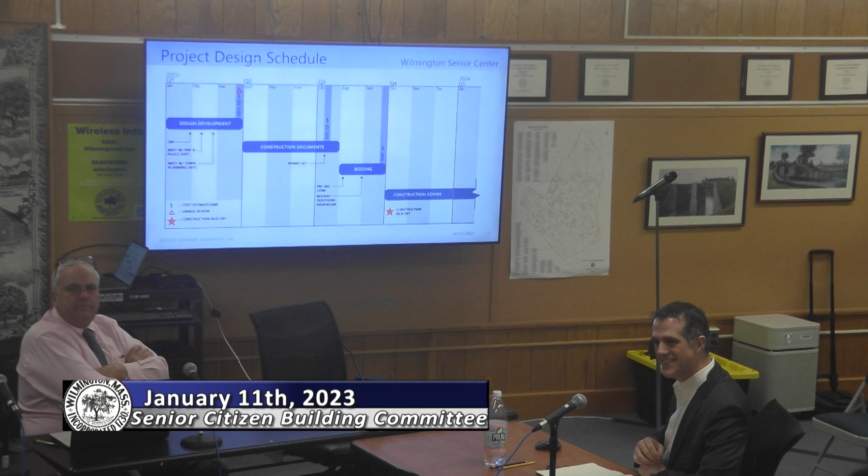That's the question, are we going to get a copy of this at the end? Absolutely, of course, I sent it to the chairman. I didn't email it out because I knew there was a change coming, which it did, so I didn't want to confuse it. That's fine, this will be sent out and all the members will get it, plus a copy will go to WCTV. The only change, in case you get the older version, is the 2 schedule slides.

So during design development, I'll just keep going. Construction documents last for about 4 months, and near the end of construction documents we have a very important cost estimate, again at 90% CDs, meaning construction documents. The reason for that cost estimate is it's our last chance to make sure the design is on track budget-wise. And if it's not, because cost estimating is more of an art than a science -- I didn't say that in public, it is absolutely a science, it is fraught with uncertainty -- because of that, we need to protect ourselves in the bidding climate. What we do is come up with design alternates, ways to control the budget as a stopgap at the end of the design process in case we're a few percent over on a given thing. You saw this happen with the estimating we did, we identified a bunch of items that could be either taken out or put in depending on the cost. It's the same thing, but we'll identify those for the purposes of bidding after that 90% set.

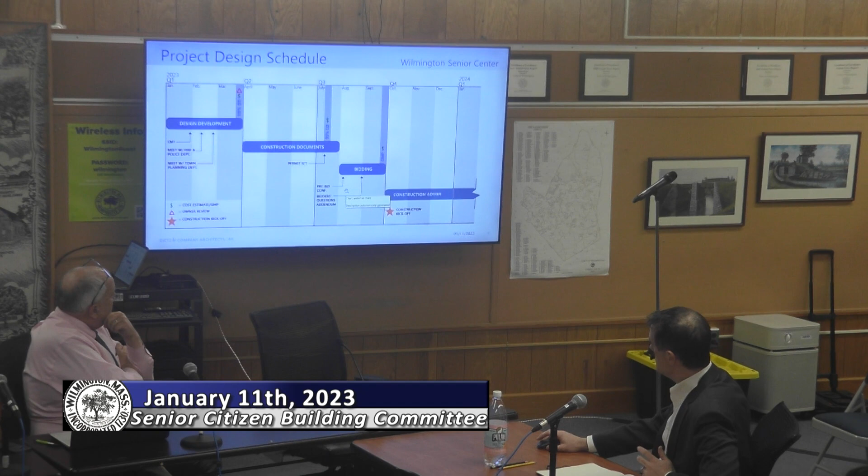Then we go to bidding. There's a pre-bid conference that we participate in with you to get things kicked off for all of the bidders, walkthroughs, that kind of thing. Bidders always have questions, and we answer those in the form of an addendum, which is additional information to the drawings as necessary to clarify bidders' questions.

The hope is over a couple of months we get to a point of getting to a GMP, or guaranteed maximum price, for the project. And that sets us in motion, among other things, to start the construction of the project.

Construction kickoff would be early October of this year. That's the hope, if everything goes smoothly. We are starting in October. We have to start in October.

We are going to meet as many times as we have to, because inflation will chew this project up. So we're going to run like greyhounds. Inflation is not helping us right now. We've set a price, so now we need to honor that.

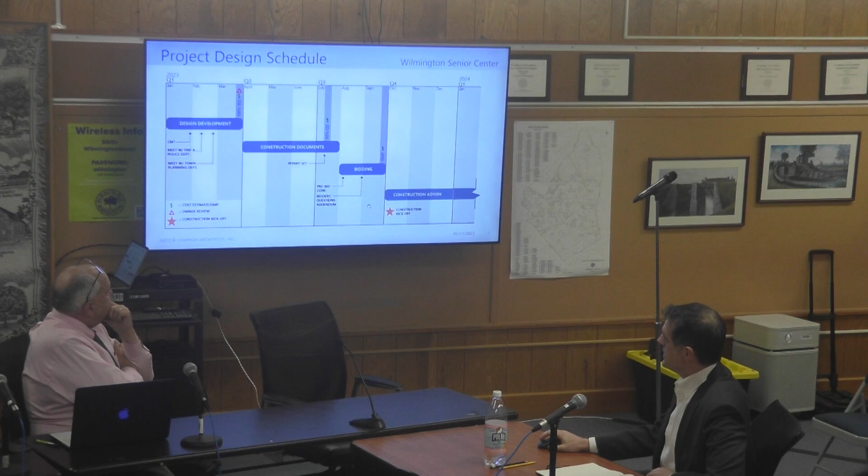A couple things in the short term that we should talk about are the CM, or the construction manager, if you want to go construction manager. That's why there's a question mark on it.

That's a discussion we want to make a decision about now and decide what our project delivery is going to be, whether it's going to be construction manager at risk, Chapter 149A, or design, bid, build, otherwise general contractor 149. Because if we decide to go 149A, we'd want to get them on soon so they could help us through the rest of the design process.

We touched on this at the last meeting. I don't see the advantage on this project for a CM at risk, not only because of size, but it's a completely virgin site without any real problems. The advantage on the CMR would be maybe some help on detailing, and I think that between the two of us, we could do that anyway. I don't think that we'll need it.

Dan, I'm sorry, if I can interject for a second, just for some of the members here that are not also on that. I forgot, so I went off.

CMR, when he calls it, is a construction manager at risk. That's how we built our high school, and on our other project we are discussing the benefit of going with that over design bid build. So I'm going to have Dan explain it to the two of you, and I apologize.

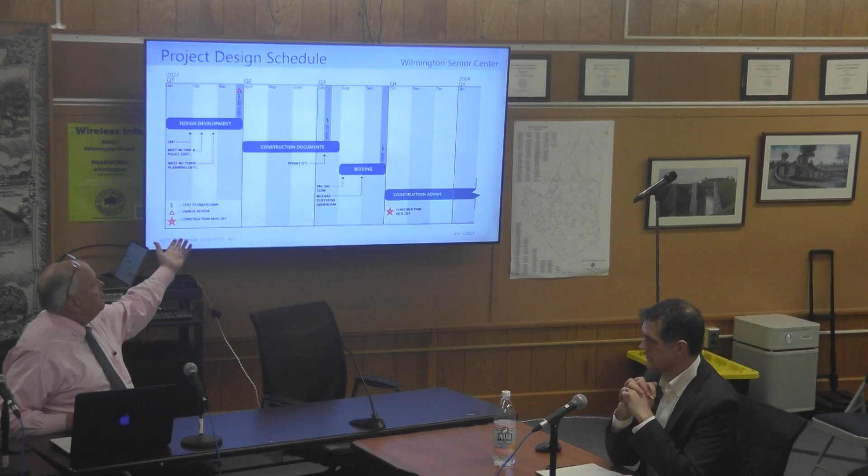So I'm 100% confident we'll get a good design-bid-build project, not worried about it one bit. With design bid build, there's a step not shown here, which is pre-qualifications - similar with CM at risk too, just slightly different. Pre-qualifications have to be done no greater than 120 days before we go out to bid, and that requires 2 volunteers from the town.

And it's a lot of work for whoever volunteers to do that, Teresa - no, just kidding. Yeah, we'll decide that at a meeting.

When the bid comes in, that's what your building's gonna cost, subject to changes here and there. With construction manager at risk, there's a pool of money set in the middle that's supposed to be used sparingly, but never is - there's very little of that money left at the end of the project. It's like a slush fund to take up things missed during design, whereas with design bid build, everything is documented to the T. Every project we've done with Dietz for senior centers - Westfield, Greenfield, and Ludlow - were design bid build, and they were all very successful projects, as I suspect this one will be too.

Does that help explain it? Yeah, yeah. Teresa just asked a question.

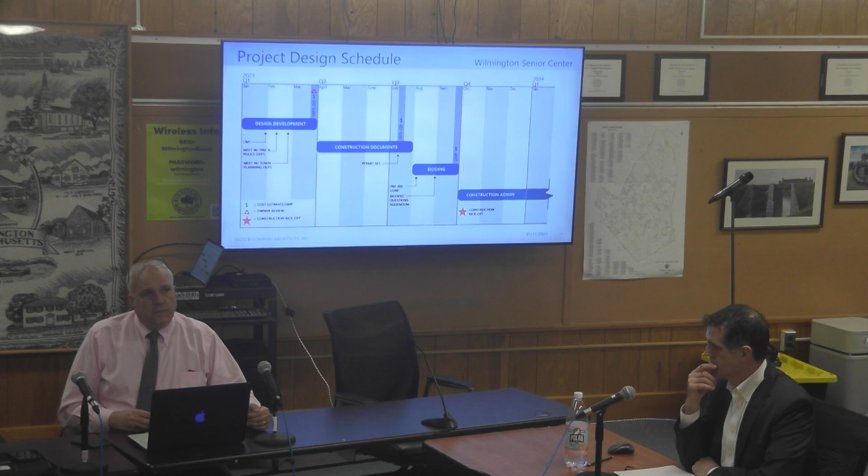I respect your opinion regarding the choice between the two, but how much money do you think it would cost, just in general? If I had to guess on this project, design bid build would be about 14 to 18%, probably in the 16% range, cheaper to do - cheaper on the total cost of the construction. So that's significant.

Yeah, because of scale. I was thinking more like 10% for a larger project, but even 10% is a lot.

We're gonna get there. We actually have a really hefty budget here. I'm not worried about the budget as much as the designer is. A lot of that the designer and I will flush through as we're designing to make sure we stay on track. The estimates at the end of DD - that estimate's really important. That will tell us where we have to push, pull, and trim if need be. But I'm quite confident we're in pretty good shape.

We're building one right now in Wilbraham, a 2-story, 15,000 square foot building, a little smaller. It's a site we had to bring a lot of fill in to build up. The construction cost on that is $11 million, and that was the third bidder - 2 bidders got disqualified. The low bidder was 8.9, but the town didn't want to wait the 4 months to rebid it, so they said go.

Did Wilbraham do a design bid build? Yes they did. And we poured our first foundation today, so I'm pretty excited about that.

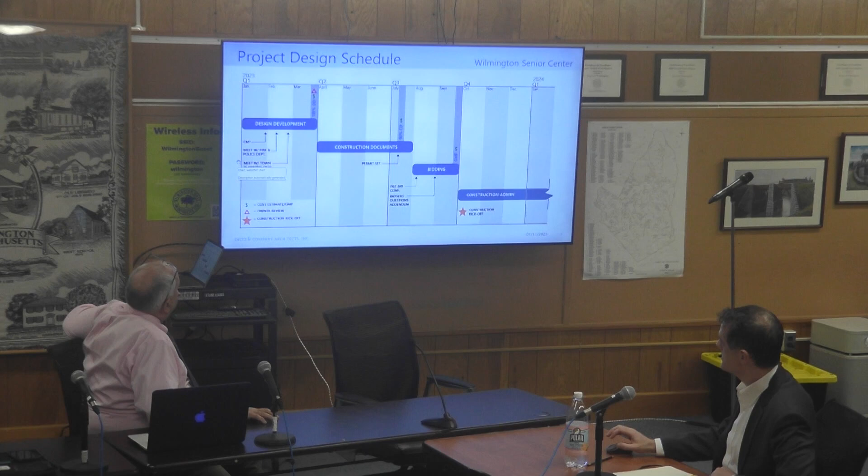As we move through DD, design development, we'll be meeting with the fire department, the police department, the maintenance department and capital maintenance, as well as the town planner, and all the necessary town meetings to familiarize the authorities having jurisdiction with the project, so they can give feedback and we can incorporate their requests into the design. The fire department is one of the most important regarding access and emergency systems. But also the town planner, so we know we're complying with all the zoning guidelines, and if we need any special help we can get it. We also want to make sure we're not surprising anybody, so we do this now while we have time to accommodate.

We talked to all these departments before we went to town meeting to see if there was anything glaring, and almost all of them said it looks good, but they really want to see the detail. So we're at that point where we're creating the detail, and they'll push back on some things and agree with others, and we'll come up with something satisfactory to all departments.

And the state needs to get involved too, right? Because every time we talked about access to the site, the state has to approve it. We need a DOT permit, and that's actually what I was going to get to next. The one thing I want to get on immediately is the curb cut permit we're going to need from DOT, Northern Region. I think you guys are Northern Region DOT.

Because it's a state numbered highway, and you don't control the road, the state does. They give the permit for the curb cut, and they'll tell us what they want on that curb cut. We'll tell them what we want to give them. But it's probably similar to what we carried anyway, which is granite curbs at a certain radius. We use state guidelines for the design of it, so it's just a matter of whether we have enough turn lanes.

Do they do a traffic study, or do we do a traffic study? We have a traffic study in the hopper, ready to execute whenever we'd like. It's actually a proposal we had from the previous phase, but they're willing to honor it and move forward with it. That's SLR. And does that determine whether or not there's signalization?

Ish, we're gonna go through that next. We'll shut my trap. We'll discuss it also in our next agenda item, what we're talking about for meetings. So we'll look through this here, and then we'll have our discussion. Any other questions?

Not on design development. All right, well I was gonna tell you what design development is. Well, now that we're gonna do this, let's talk about it a little bit. I'll put it in context for the benefit of everyone, because I think this is important. Feasibility, and I know we've already done it, just hear me out.

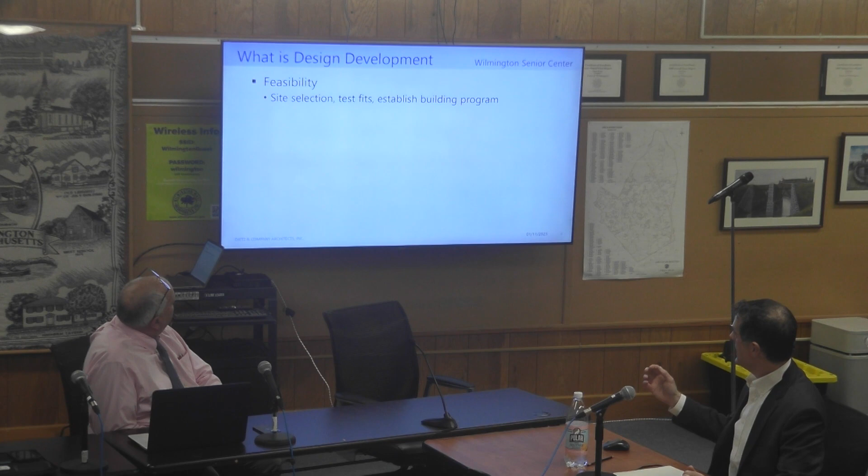Feasibility is where we did site selection, building test fits, and we established the building program. What's in the building? What are the uses? How big should it be? Where should it go? That went on for a while, and we found a really good fit, and so that led us to schematic design. In schematic design, we did all those adjacency diagrams and building program explorations and came up with a building plan to fit on this site that responds to the nature of the building's character.

And at the end of that, we developed a few drawings and systems narratives for all the building systems, to which the estimate that we went to town meeting was based on. So the civil engineer, landscape architect, and the architect, us, we all made some basic drawings to describe what the building and the site look like. But the rest of the engineers—structural, mechanical, electrical, plumbing, fire protection, data, security—they did narratives to describe what the systems would be, but they didn't do drawings.

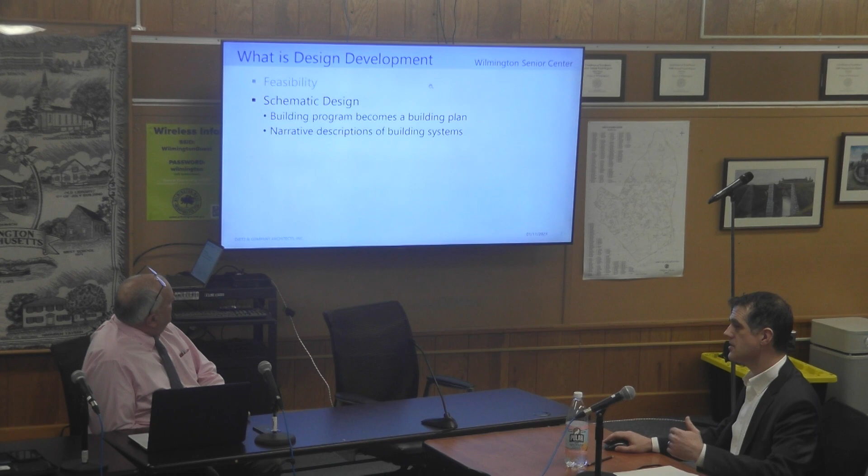They're going to start drawings now. So design development, it's what's up here. It develops the architectural character and detail of the building. What does it actually look like? How does the design play out across the building? And it integrates the systems into the building.

So we said previously we're going to have a certain type of mechanical system. Now we're going to fit the actual mechanical equipment. We're going to test fit it in the building to make sure it fits, that we can route the ducts as necessary, that the equipment is sized and specified in a way so we understand how many pieces there are, where it sits, how it breathes, all those kinds of things. We're actually going to design the system. The engineers will design how many sensors they need and where the diffusers go and all of the things. I'm picking on mechanical in this case, but that's how that happens.

And it will be iterative, meaning we'll try some things and we'll find some clashes and we'll find some things that work, and we'll come up with a building that works together. It's a lot like the systems of the body. At the beginning you have a description, and then design development is when all of the systems get put together, when the muscles and the skeleton and the nervous system all get put together.

That is the first time I've ever heard, in all my years, design development turned into a human body. Yeah, I try something new every time.

For a project this size, do you use BIM modeling? Yes, absolutely. BIM is Building Information Modeling, and we've been using BIM from the very first day.

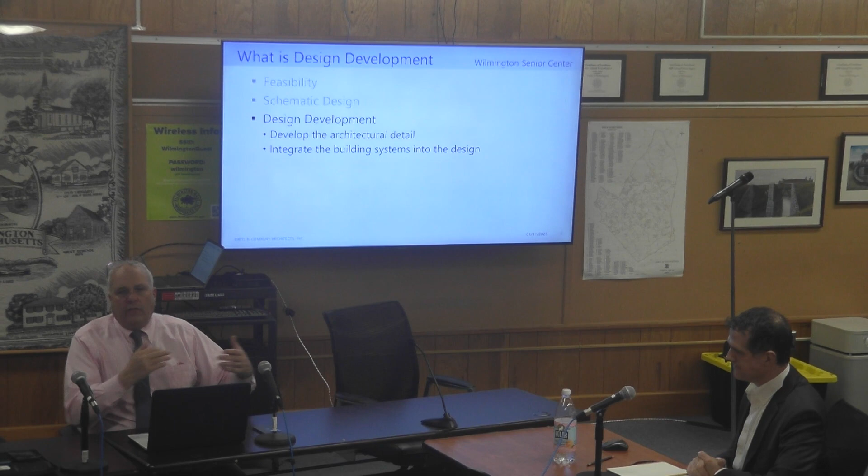Those types of things start to occur during design development. He'll come back and say, okay, because we have so much weight on this section of the roof, we had to add a column here, so we're gonna do a decorative column in the hallway, or something like that. All of those things pop up in design development.

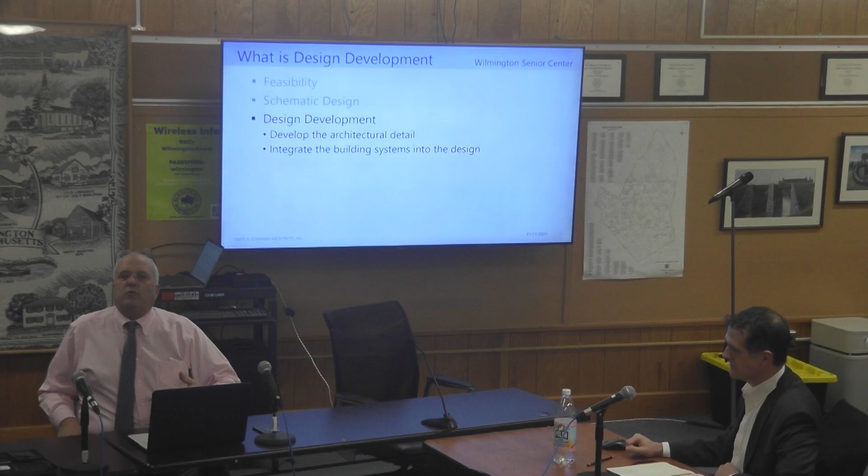And that's why we have design contingency in those estimates - remember we had that discussion? What's design contingency? Well, that's to take care of the things he's gonna pick up in design development that weren't clearly identified, but we know is roughly 10 to 12% of the budget.

So during design development, we develop the design of the building and try to agree on it as much as possible, so that when we go to construction documents, we can document the architecture and engineering so it can be built. The idea is that construction documents create the set of drawings and specifications that can be bid by contractors to actually build the building.

They're not going to build it from physical models like the really old days, or from our presentations that we make to you. They need technical documents, and that's what construction documents are for. Because they're technical documents, they take a while to assemble, since they're fully coordinated with each other and everything stitches together into a big set of drawings and specs.

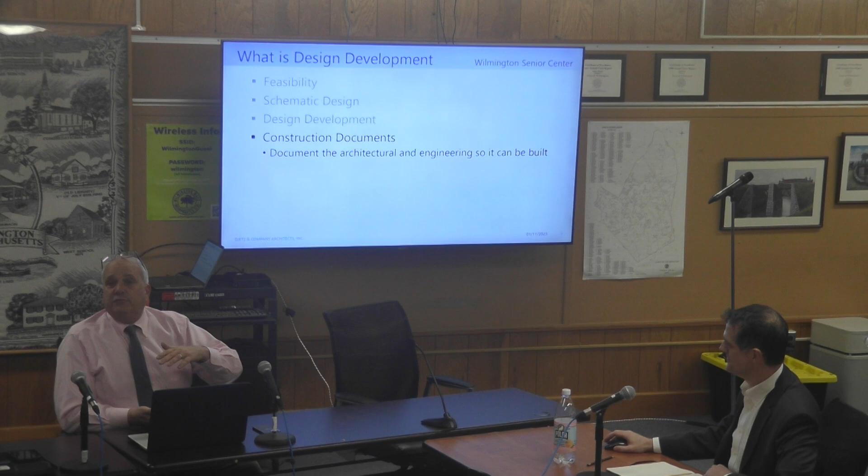And they'll be this thick? 30 by 40, excuse me - they'll be bigger. And then you'll have two big books of specifications identifying each part of the building, and what the acceptable manufacturers are, to make sure we're getting quality manufacturers for every single part in the building.

And you have to proofread everything. My pleasure - Teresa has volunteered again to proofread everything.

In addition to what Dan said, there'll actually be three manufacturers listed for every hinge, screw, and mechanical diffuser in the entire building, because this is a publicly bid job and we need to, by bid law, offer competition - three equivalent products. We will run into some cases where there won't necessarily be three exactly equivalent products, because there are some novel building materials in the market.

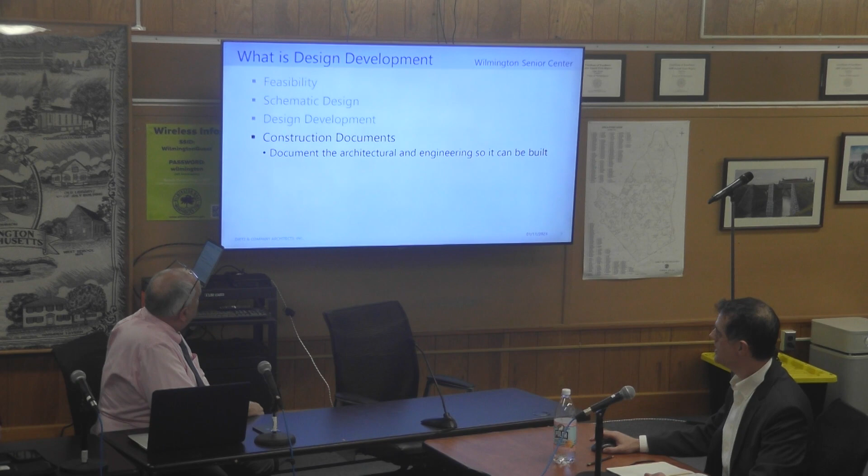In those cases, we can go a couple of different ways. We can ask for a special exception and request permission to put in a proprietary product, meaning Kleenex as opposed to tissues. Or we find other things that are roughly equivalent that we consider equivalent.

There are some bricks, for example, that there's nothing really quite like. They're made a little differently, but you can substitute a couple of different versions of masonry to do basically the same thing - I say brick in a general way.

We will be asking George what he wants proprietary for. Usually proprietary items are the fire alarm system, so it matches all the other buildings, the security system, so it matches all the other buildings, and the building management system, so that George - or his or her successor - can pull out a phone, tap the high school, then tap the senior center, and so on. We want to make sure it's integrated.

We understand that this is part of a campus of buildings in town, even though it's a standalone building, and that's a good reason to go proprietary.

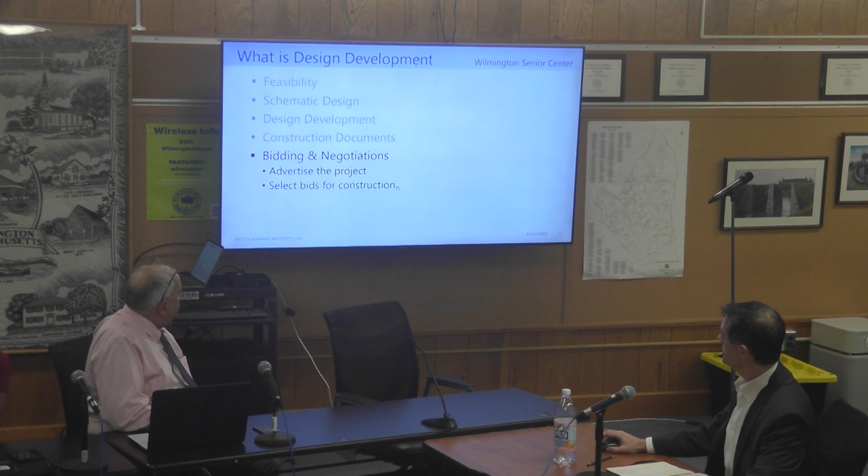After construction documents, we talked about this a little bit, it goes to bidding and negotiations. We talked about the bidding part, the negotiation part is just the other half of the phase, but it's when we're negotiating with contractors and answering questions and that kind of thing. It includes the advertising of the project because it's publicly bid, and also the selection of bids. It's a relatively brief but very exciting period in the job.

And then we go to construction. Construction administration is the architect's role on the project because we administer construction. We don't build buildings. Contractors do.

Architects just make the, they're not even instructions, they're the biddable documents. We tell them when they do it wrong. Because they should be able to read the documents and do it right themselves. There'll be nothing wrong.

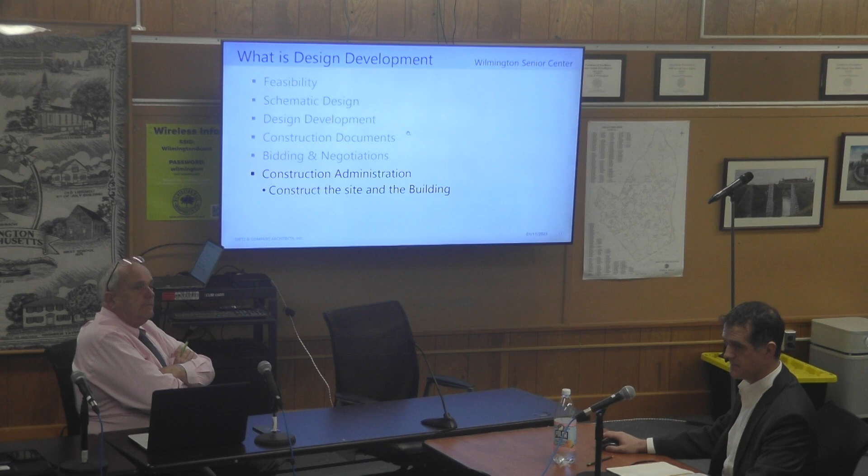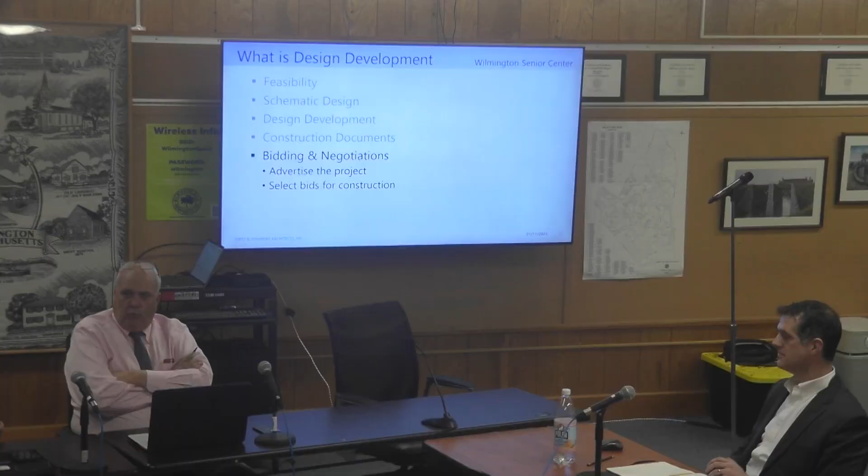So on the bidding, you put it out there publicly, so the businesses that bid on it will know it's for Wilmington, and they could just look up town hall and see what we've appropriated for it. The answer is not only would they know what we appropriated for the whole project, they'll have access to all the presentations we've done.

But we actually have to tell them in the bid documents what the last estimate is. So the last estimate might be different from what was presented at town meeting, it might be less. At the 90%, we will advertise what we expect the project to cost. So everyone thinks they look at that and then bid around that.

They really don't. Two weeks before the bids come in, we will be taking bids for up to 16 trades. We probably have 10 of the 16 trades on this project that are called filed sub-bid trades, which were identified by the Attorney General and the Inspector General's office as needing to be bid earlier. Those bids come in, we determine whether the bids are valid, and then we post the list of those bids. Then the general contractors have to identify which of those bidders they're taking. They always take the lowest, otherwise they don't have a competitive edge.

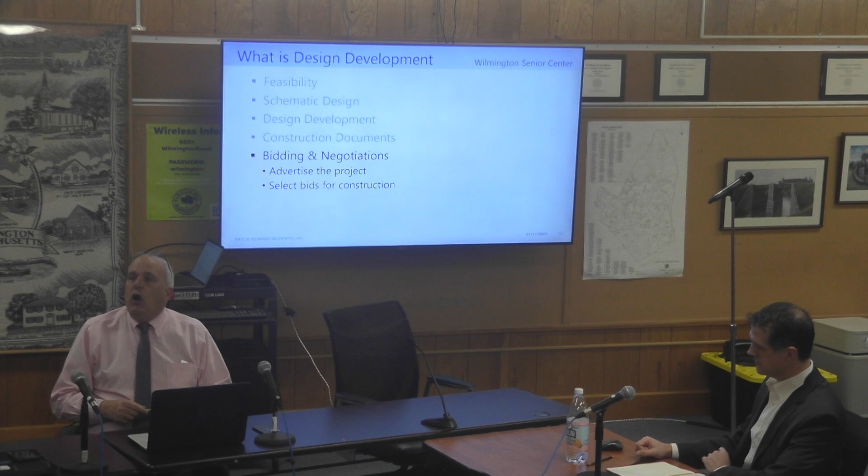So they're going to know what, 30 or 40% of the cost of the building is, two weeks before they even bid this, because they will have the filed sub-bid information.

That filed sub-bid procedure is unique to this state and very few others, and is the real differentiator with cost and public bidding that makes Massachusetts a fun place to practice.

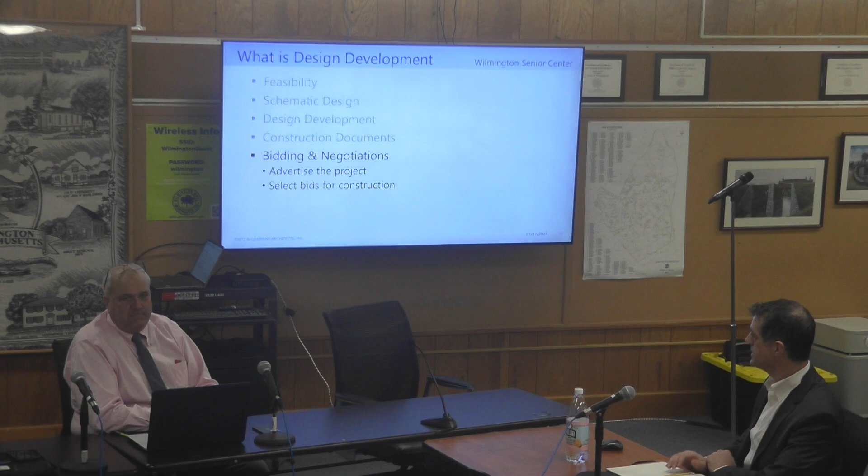We are smarter than 49 other states, right, Paul? Yes, we are. There you go.

Okay, so what I'd like to do now is go through the various design disciplines and tell you what we'll be doing during design development.

So for landscape design, we are going to be developing the patio spaces and the trails, the trees, the plantings that are around the site, the garden planters and how they relate to the patio and the exterior environment, and of course the play spaces, the bocce and pickleball courts.

Just saying, I actually thought about that when I was doing this last time. It also comes second, sorry.

The landscape design is really going to be developing what it is like to be outside and around the building and on site, what kind of shade trees we'll have, how the plantings work together, the type of garden planters, those kinds of things, as well as contributing to the stormwater controls through passive measures like planting areas that can help contain and filter stormwater to some extent.

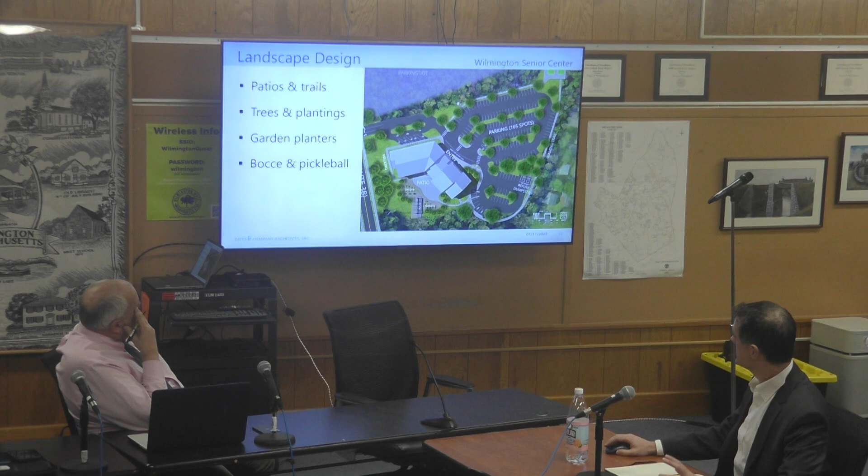So that's landscape design. Civil design, I chose these images on purpose, so landscape is nice and colorful, civil is nice and black and white. Civil design talks about the site grading, how we get stormwater to be collected so it doesn't cause problems and controlled, how we bring the utilities onto the site, and it talks about site access and parking. In this case, site access is vehicular access, that's the curb cut we started talking about. They'll also contribute to permitting because there's a fair amount of site permitting to be done with this as well.

Landscaping is usually the first thing we cut, just so you know, because it can always be planted later. The engineer doesn't want to hear it, but he's used to it. That's why there are so many plantings on this illustration, he's already got them in there so we can sacrifice them. They're also the last thing to be installed during construction, and if you run out of money, you run out of money, and that's kind of how it ends up going sometimes, that the landscaping gets cut. So keep that in mind as we're making decisions and moving through the design and construction process, that we want to maintain as much of the landscape intent and integrity as possible.

Teresa asked: the walking trail is only going to go up as far as the pickleball court and then turn around? It's not going into the land beyond that? Correct. So once we determine what we're doing with that land, could we possibly extend the walking trail at a later time? Right, yeah, down the road, okay.

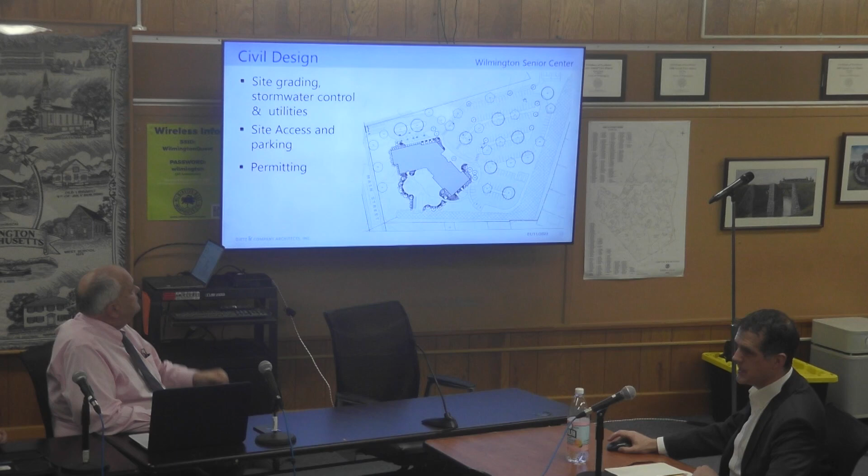This is an old illustration, we fixed that. He asked, you realize we're not going onto their property? Correct, yeah, we actually corrected that, I grabbed the wrong image, I do apologize. We are no longer crossing the property line. Our intersection is not perfectly aligned with the street opposite Main Street, it's close, and for all intents and purposes, aligned. But in order to perfectly align them, we would need to cross the property line to the north, which we don't. It's good, it just takes forever to get even an easement from the archdiocese, it's not easy. This site doesn't dictate that necessity. It's not so built up that we need to ask for permission to trespass onto the other site, or get an easement in technical terms.

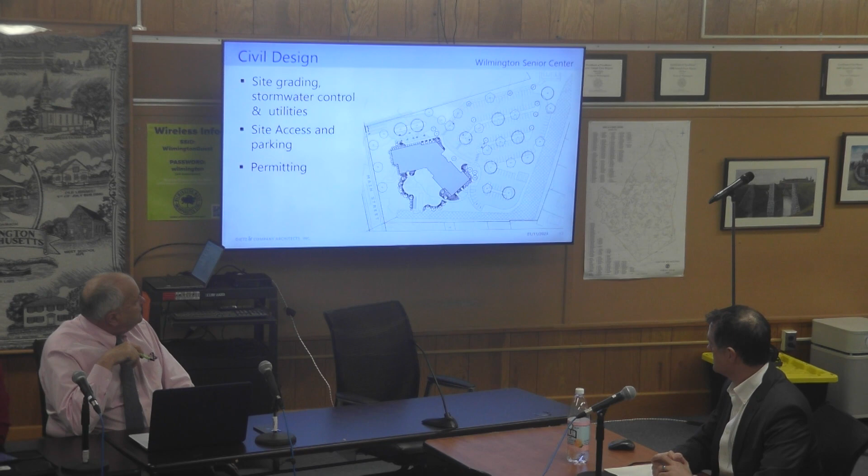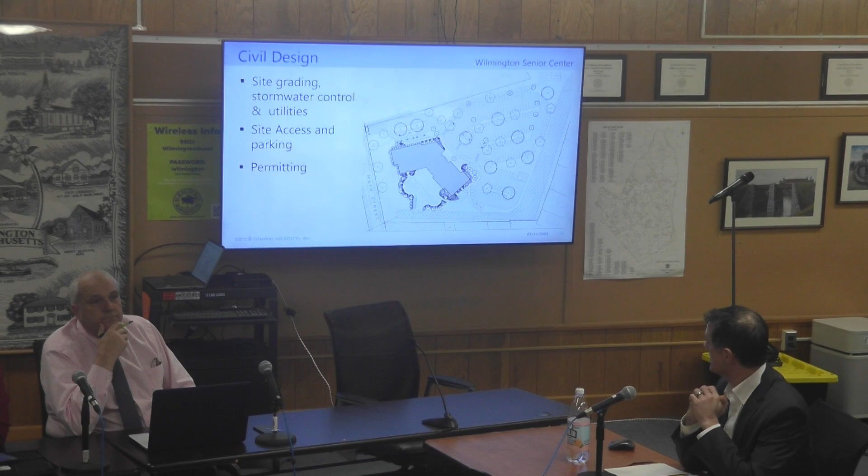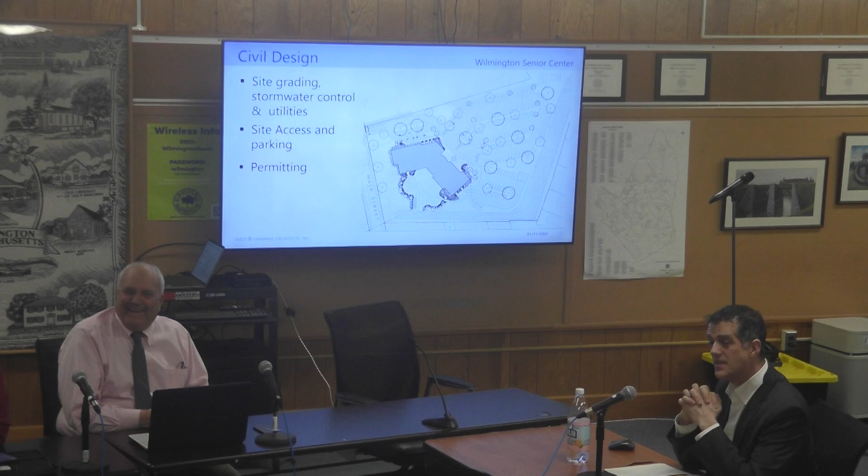Well, I'm not talking about major things, I'm just saying to keep in mind that was a priority. Looking at that building right there, he's probably got $80,000 worth of landscaping, at least, which isn't a lot percentage-wise of the project. There are quite a few trees out there. Our goal is to put it all in so that George can maintain it. I just needed to say that.

That's why I made the comment at the end, that we really need to keep in mind that is designed just as much as the rest of the project, and we want to make sure it happens. But as costs get more clear and bid packages go out, we'll have an understanding earlier on as to what these costs plugged in together are going to be, so we're not in the ninth inning with two outs saying we can't do the landscaping.

I missed the beginning part of the meeting. We went over the cost estimates, when we're going to do them, and how we're going to steer the job to get to that point.

When we get to bidding, there's no question in my mind the majority of landscaping will be an alternate, because it gets done 14 or 12 months later. And if we ran short and had to take $100,000 off because that was the alternate number, I have absolutely no doubt there'd be fundraising to raise that $100,000 somewhere in that 12-month period.

So it's exactly like Lee said, it's like an escape pod that we'll be using during the bidding process. It might be some extra special trim on the inside or whatever. We haven't gotten that far yet, but we will.

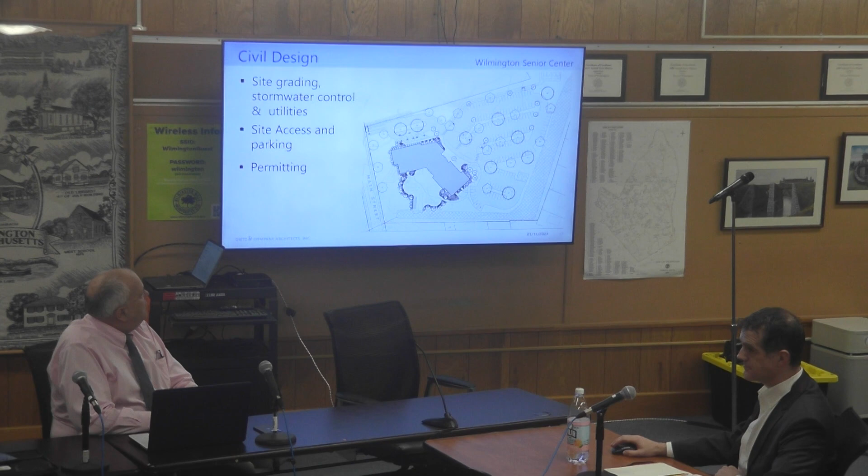Anything else? So I've split the presentation at this point into interior architecture and exterior architecture because they really are different in lots of ways and require different responses from the committee, and also different efforts from the design team. The interior architecture is going to launch into a great deal of specificity next.

We're going to talk about room data sheets, which are basically tear-off sheets or cut sheets for each of the room types. So, Terry, we get together and talk about exactly what we need in the fitness room for it to be successful. We write down everything from the height of the mirrors to the number of shelves we think will fit, to exactly how many cubbies or hooks we need on the wall, a bench or no bench, movable things, all of that. We include a small plan so we know as we develop over the next few months that we've accommodated all the things that make that space work.

And we do that for every single space throughout the building. Some we group together, like the admin suite will be one concept and the kitchen will be one concept. That way we gain a better understanding of what's necessary, and get a better estimate when we go to get it estimated again. We can also understand exactly how complicated some things are, like the kitchen, how far do we want to go with that. It also gives you an opportunity to adjust the admin suite again as necessary based on staff and resources.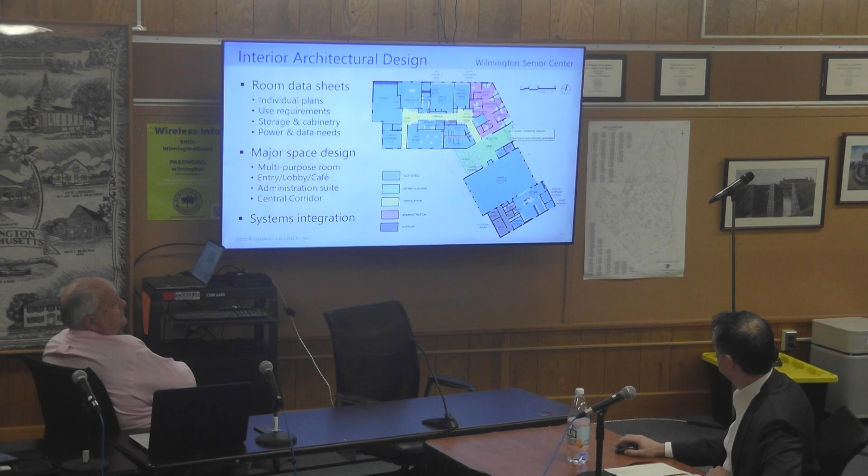I have to be honest, I want to punch that box. A little yellow box. A little yellow box that's following you around. Oh, that's a picture containing a diagram. You like that? Sorry about that. I want to kill it.

Systems. The building systems that we have narratives for describing their components and characteristics, we will get real drawings for in design development. So we'll have structural plans, plumbing plans, fire protection, otherwise known as sprinklers.

I'm looking in this room and realizing there aren't any. Just going to point to them, but they're not here. Heating and cooling, ventilation—there's none in here other than the windows, but there'll be active ventilation in this building, as we've discussed previously. And then, of course, power, which includes lighting, data, and fire alarms, so regular power and low power. It's the design team's job to integrate all of these things in the building so they work together and behave like a proper building when we're done with DD.

Can I ask a question? What's data? Oh, sorry—computers. At that point, we'll be bringing in John O'Neill, our IT director, and start talking more and more about this.

He'll tell us what he wants for racks, what types of racks. In the general contract, what we normally do is run all the cabling, all the jacks, and the patch panel in John's room, and then we test all of them to make sure they work. He gets a report saying they work at the right data speed, and then he takes it from there. He puts his server in a slot in the rack, and then he jumps the cables. You go into those rooms and you see all those jumping cables—he does all of that.

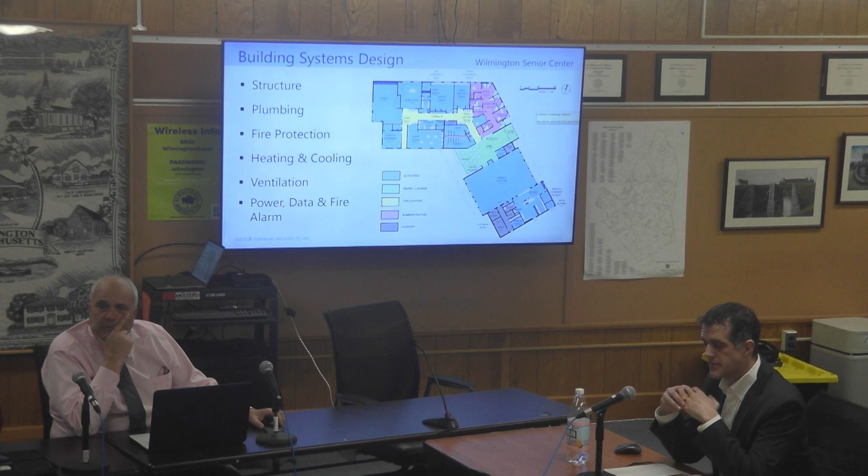Correct. And one of the other things, especially with older construction like this, if you notice, there's no accessibility. That's why with newer construction everything's exposed and surface mounted—because there's no accessibility otherwise. Everything goes to a data closet, and then you'll have suspended ceilings for different areas. I just didn't know if he'd go upstairs like with the heating and AC that was up in that attic. He should only go to that patch panel.

Okay, wonderful. Which will actually be in your office, off of this conference room right now in the admin suite. Oh, perfect. There's a main data entry down here somewhere in the bottom right corner, and then there's a middle server room to minimize the runs—you get a certain number of feet before you start having problems. Thank you. Any other questions? These are really good.

I'm just gonna back up real quick, because Diane Allen is texting me with a question—an interior question, maybe premature. She's asking about the kitchen, whether or not the freezers and refrigerator are built-in or not built-in, or do we know that yet? That's an excellent question. At this time, we are showing them as what we call reach-in freezers and fridges, so not built-in.

They would be equipment on wheels, sitting in the kitchen space. They're bigger than a residential fridge or freezer, about 4 or 5 feet wide, a couple feet deep, and 6 feet tall. That's what we've typically done for a kitchen this size, because a walk-in fridge or freezer is overkill for the capacity of the kitchen. You also get a lot more usable space doing reach-ins on wheels—otherwise you end up walking through the refrigerator into the freezer, unless you have a huge freezer with 2 doors, and the width of the door is 3 feet.

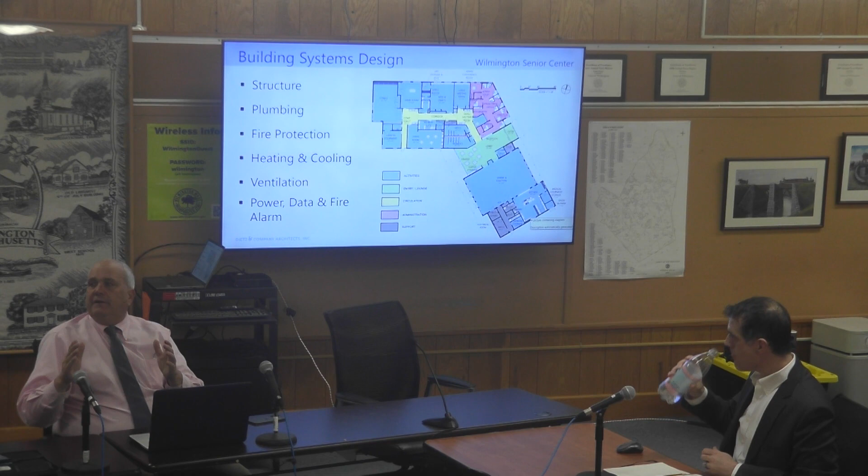So you think of 3 feet, and then you got 18 inches and 18 inches. You lose the rack space as you're walking through to get to the second one. We did discuss this previously too. Yeah, we did.

I think we showed a couple examples, if you remember in Westfield. Westfield has a built-in, and Ludlow doesn't. Ludlow liked the freezers on wheels, but they didn't like the layout of the fridge freezers on wheels, because one of them didn't fit. But they liked the concept. Westfield was all in on giving them a walk-in, because they make their own food, they have a bigger clientele, and they make 3 meals a day there.

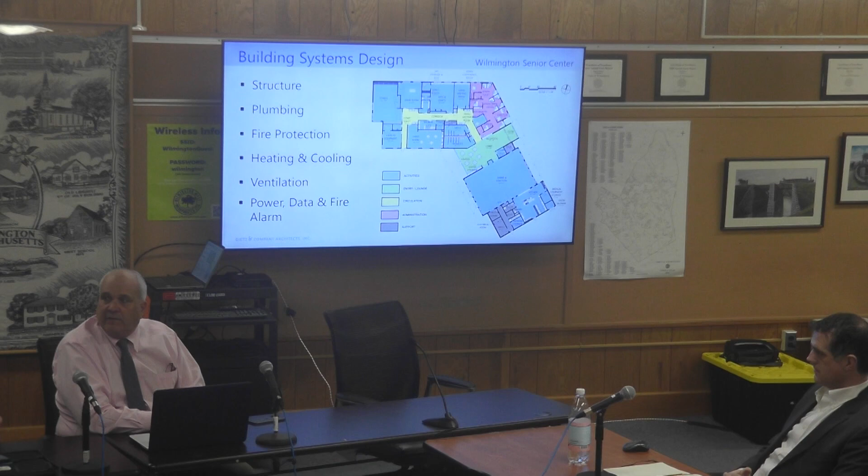So, can I ask a question? Sure. One of my questions is that, at this time, are we providing meals at the center? The school system is doing that, they're making it.

One of the things that would be wonderful to foresee for the future is the potential to have everything done at the senior center. We're not talking right away, but I think we need to foresee that in the future. So I think it's a discussion that the kitchen is gonna be used a lot more in the future than it is in the first 3 to 4 years. So is it viable to have a standalone freezer versus the moving one?

Kingston Senior Center, which we didn't visit, had all their meals delivered by South Shore Elders, similar to this, they had a little warming setup. But every Thursday they cook their own meal. So the kitchen, which is about half the size of this one, was more than adequate for them to cook their own meal, and they had the equipment to cook their own meal. You'll have the equipment to cook your own meals here, okay?

Whether it's the fridge freezer, we'll ask the kitchen consultant whether they think you have enough for 5 meals a week. I can't answer that, but I can tell, looking at that kitchen, it's a pretty sizable kitchen. And that was the goal, so that in the future, this would be supplementing nutrition for seniors, as things get tougher and tougher for seniors.

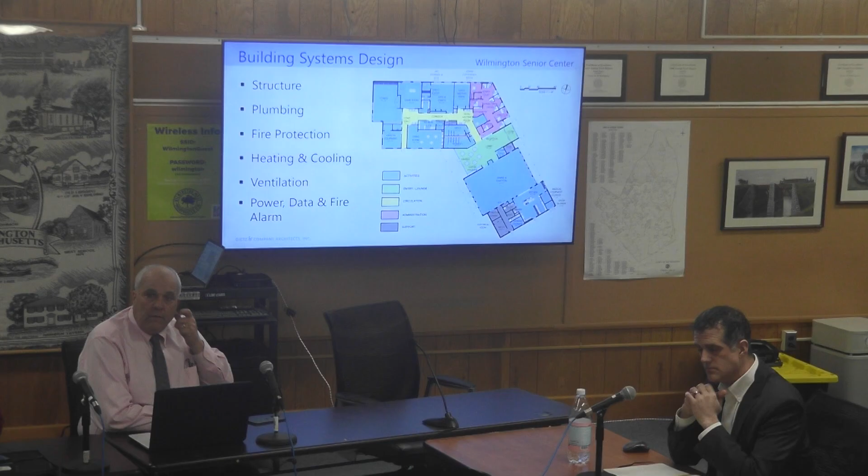Terry, do you have a vision of what you think that may be in the future? Would it be like a daily thing? Yes, it would be. Right now, daily, we rely on Western Intermediate Kitchen to be making 70 to 80 meals a day for our home-delivered meal program. I would foresee it to be...

To be able to, in the future, it'd be easier for the department to maintain everything right in that building, so we know exactly the food in and out. But also that kitchen could be used not only for the home-delivered meal program, but also for catering events, instead of going out to halls, we can do everything within there. So I do see that kitchen as being very highly active.

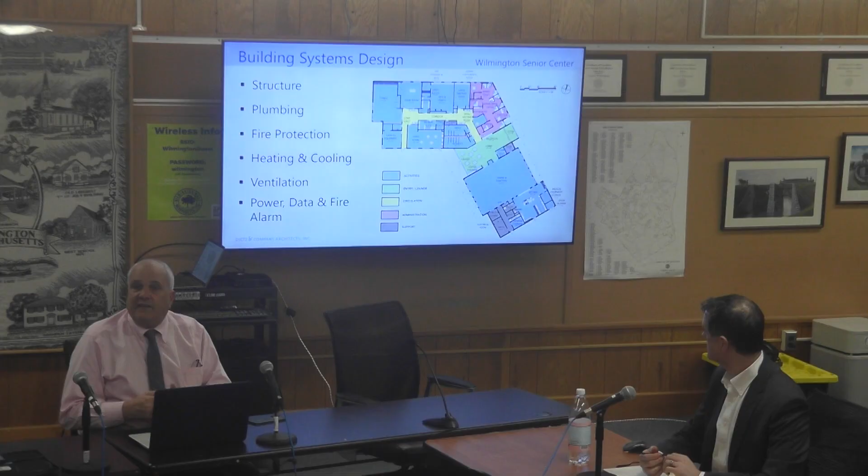Beautiful. I'm just bringing up the future plan for that, and just something for our thought when we design it.

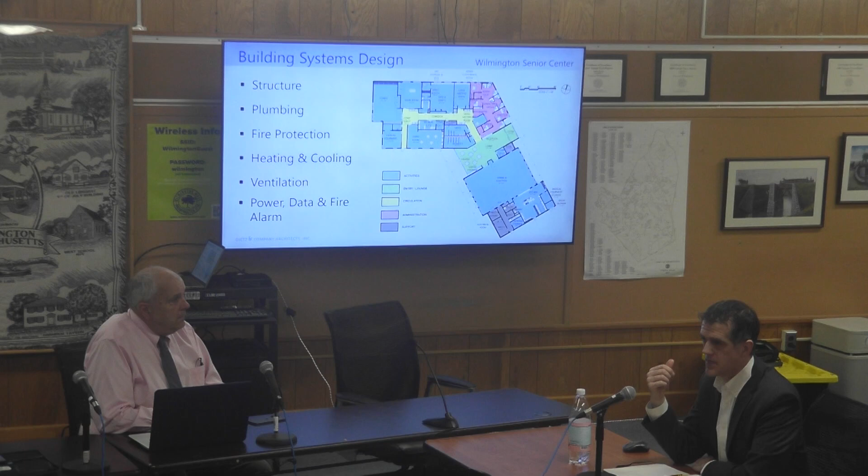The space that's shown here and some of the equipment shown here, this is bigger than a commercial kitchen that was designed for a 300-unit senior housing building in Cambridge. They weren't going to be cooking every meal for every resident, but they have a 10,000 square foot community center. They went with the reach-in fridges and freezers just like this. I think they had 1 and 1. We have 2 and 2 here.

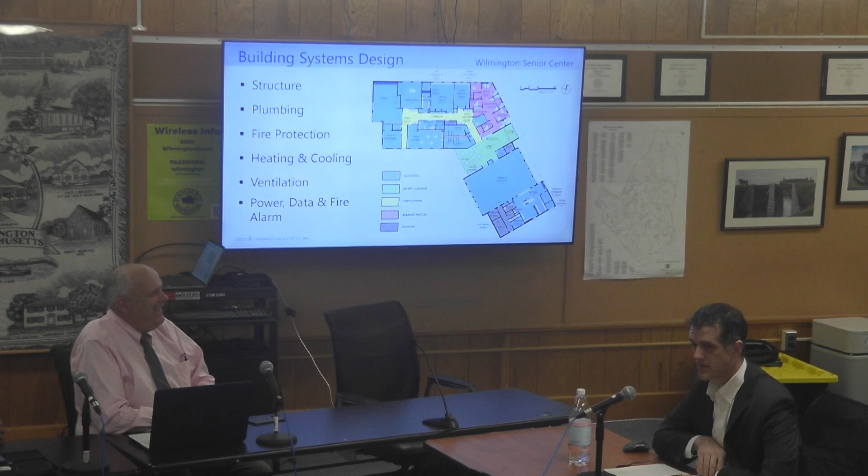They have a little bit more dishwashing capacity because they have a large community room. This has a tilt skillet, a grill, hand washing stations, a pot and dishwashing station, two fridges, two freezers, and a full line of storage, as well as the serving counter and a couple other pieces of equipment. It's all commercial sized, like a 3-pot sink. That island in the middle will have a dedicated hood over it, as well as a hood for the dishwashing station. So it's the real deal.

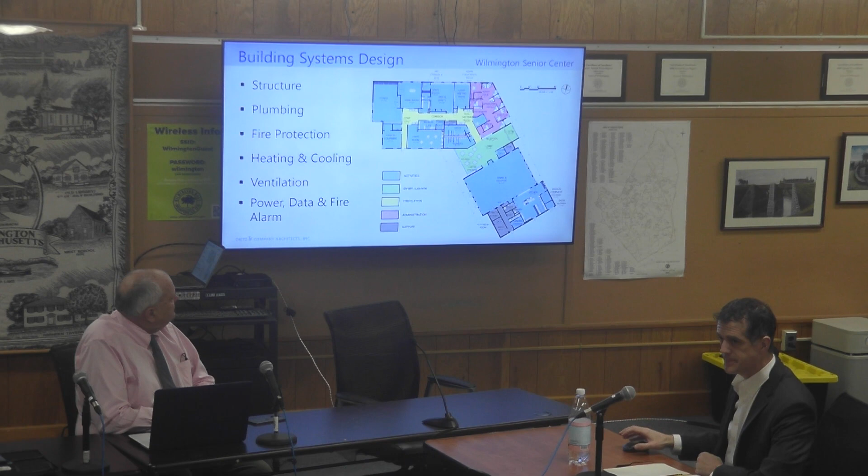Any other questions? All right, that won't get cut if we get low on money. Don't cut that.

The exterior architecture is going to develop in a number of ways. We're going to integrate it with the site, how the porches and the patio fit in with the drop-off for the front door, as well as the relationship of the patio to the porch in the back. We'll also develop more the service entrance for the building, so that it has all the space allocations and needs we require.

And also we're going to get into what the building looks like, in air quotes. What are the materials on the outside? What color are they? What texture? What kind of roof? I know this illustration shows all standing seam roof, but about 70% is supposed to be asphalt shingle. So what color roof, what type, in what locations? How does that work with the exposed glulam beams and rafter tails being illustrated? Where does the stone base come up? What color is the window, the actual glass, and what color is the frame on the storefront windows? All of that is going to be elaborated in design development.

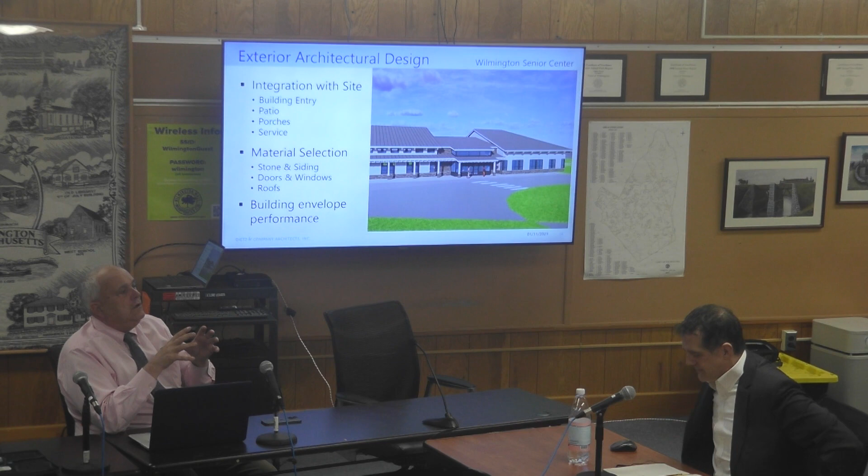You're also gonna blow up the entrance too. One of the things we got stuck on 3 or 4 meetings in a row was the entrance. I know Diane wants - she's not here, but Diane... it's still on the wants list, yeah. Diane wants to make sure the entrance is pronounced and you can see it. She's watching? Choose your words carefully.

I know by looking at this that it's a pronounced entrance, but those of you not used to seeing these types of images, we need to prove it's a pronounced image. I think when this is all said and done, Diane's gonna like where the architect has gone. I just don't think the architect had drawn it complementary to what was the vision in his head. But I think we're gonna have a really, really sharp building here, and I think a lot more will come out in the details, on every aspect of this.

I don't mean to shoot myself in the foot, but at this time I will do so by saying: if there's something about the building still bothering you, or that you don't feel is resolved, now is the time to address it before we move on. I don't want to be unresponsive to the committee or the desires of the community if you feel something is truly off. Not to dig up old issues, but now is the time to address anything and come to agreement and resolution to move forward, because we all in the design team want this project to be something you truly love.

Well, I'm happy to see that the rafter tails are now natural wood - thank you, they were white last time, this might be an old image. And also, when we're talking asphalt shingles, yes, the bigger roofs are supposed to be asphalt, the lower slopes are... I wasn't picking it apart, but I think it looks amazing.

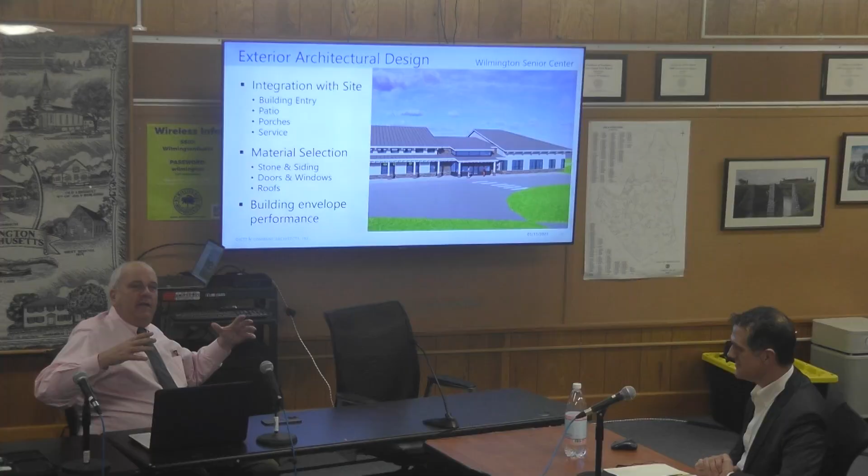Maybe you can text Diane, she wanted to make sure it was pronounced. How do we manage pronounced and soft at the same time? Well, that's your job. I think you'll absolutely get there, and I have faith it will look amazing. I appreciate that, and I look forward to that back and forth and getting to a place we're all happy with.

The other thing I don't really see on this is signage. I was just thinking that too. Great minds think alike. Like right across the top? Either that, or something coming in on the side. I don't think it should be on this facade.

It should be on the side facing the street. Maybe coming down the street you'd see 2 granite pillars with Wilmington, something nice that matches the theme of that building, or the same as the high school.

Spending money? We'll just draw that up for you right now. We'll have a sign. We borrowed curbs from DPW - an 18-inch piece of granite.

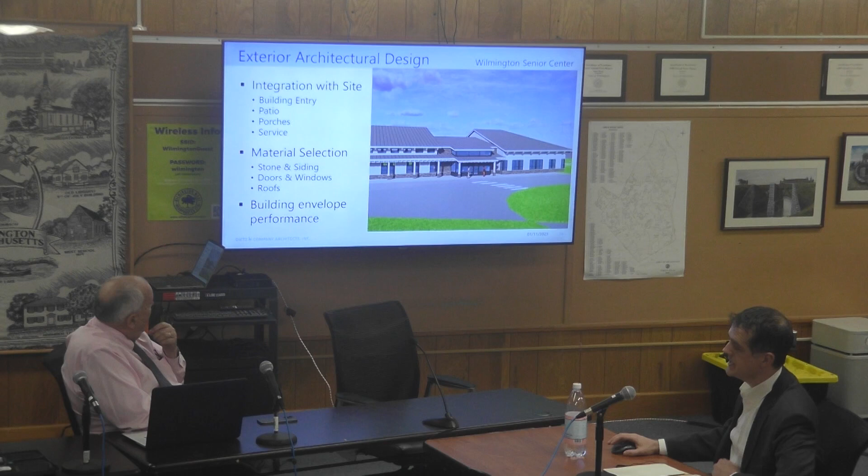The last thing we're going to do is work with our engineers to develop the envelope of the building. By that I mean the roof, the walls, the insulation, and the size of the windows, and the performance of all those pieces, so that you have a well-insulated building that is not leaky, that performs very well, that'll be comfortable to be in, and we can minimize our mechanical system as much as possible to make it more affordable to buy and build, but also affordable to maintain and operate over its long term. That's a complement of the building's envelope and the systems inside of it.

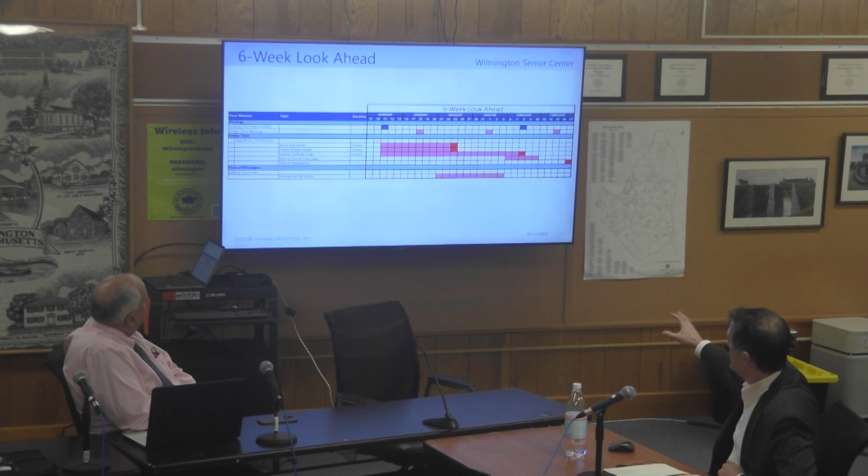All right, 6-week look ahead. I tried to make this bigger because I think it could be a good tool. It's still a little small, but the basic idea is that over the next 6 weeks, between now and the 17th of February, we are going to do the first half of DD. So at the end of this 6-week period, we will assemble our first drawing set.

It'll be an internal drawing set, not going out to anybody, but it'll be our first full drawing set of all the engineering disciplines, and will be our first real internal deliverable of drawings. To get there, there's a lot we need to discuss. It won't be everything, but it'll be the first half.

What we have here are regular meetings planned out, once a month for the time being. We have this one and then another in mid-February, but I have a feeling with all we have to do, we might want to go twice a month. We can also decide if we want them half virtual and half in person. There'll be times when you'll probably want me to bring samples of materials or boards of things to show you, like interior color schemes or exterior surface materials - that'll be done in person. We can do a field trip out to the office in Springfield if you want to, just for fun.

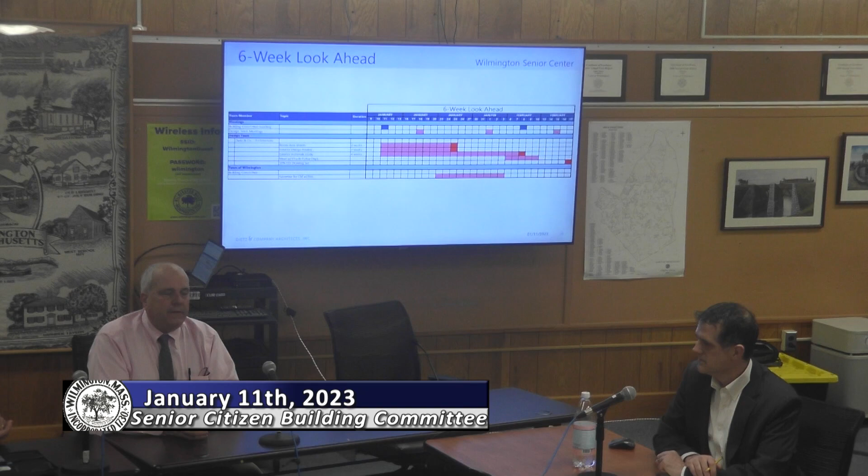I had one more item on here, but we don't need to talk about it because we already ruled it out, which is advertise for CM at risk. So that's the end of my presentation — any questions, discussion?

I seem to recall, and I could be getting the projects confused at this point, but did we have a discussion at some point about whether we were looking for a generator or not, and how did that get left? I believe we have a generator in the project at this point in time. But we're not sure if we're going to get one. No, I believe we have a generator in the project.

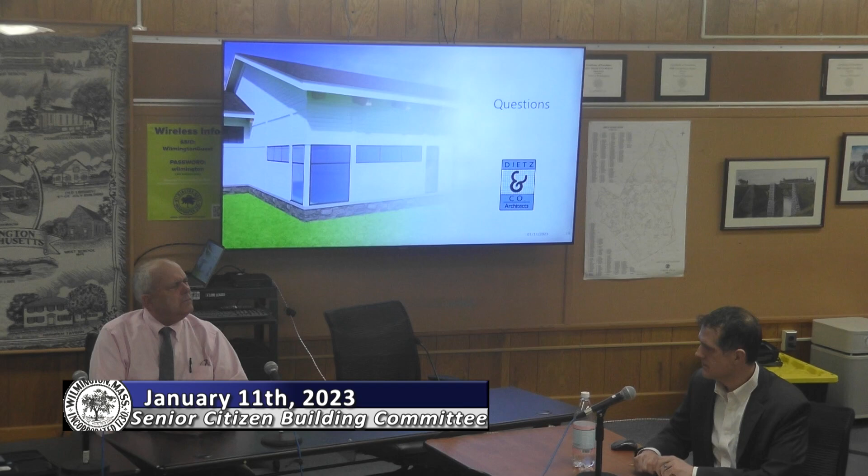I believe that when we did the value engineering meeting, we added the generator in at 157,000. We took out — I forget what we took out, do you remember? Stamped concrete, we took that out. And we added $200,000 for... WCTV? No, that was the other project, the town hall project. For this one, we added in the generator for a little over 188, and we took out the stamped concrete, which ended up being 157,000 add.

I thought we hadn't had a final decision on the generator. You're absolutely right, your memory is good. It's in there as a placeholder — it's that we didn't decide if we want it, exactly how big it was, and how many things were going to be accommodated by the emergency generator.

But the emergency generator and associated electrical equipment allow for that switch over to an emergency power source. Is that an add-alt, is that what we're going to do? It was an add-alt, but it was absorbed into the base number. It's in the project right now, and the engineers have to draw up the loads.

If the generator's an oddball size or too large, we'll talk about running certain things - usually the fridges, the freezers, the lights, security, and life safety. There was also a question of how to fuel it - whether we're going to have a gas line come in or do propane. Diesel. We have natural gas there, so...

Well, that's an excellent question, and you're bringing up some of the things we need to decide on - what the mechanical systems are, whether it's going to be an all-electric building, or if there's going to be gas for the commercial kitchen. Is that enough to justify a big enough service to bring gas to the building, if it's not used that frequently, or do we need to bring it also for the generator?

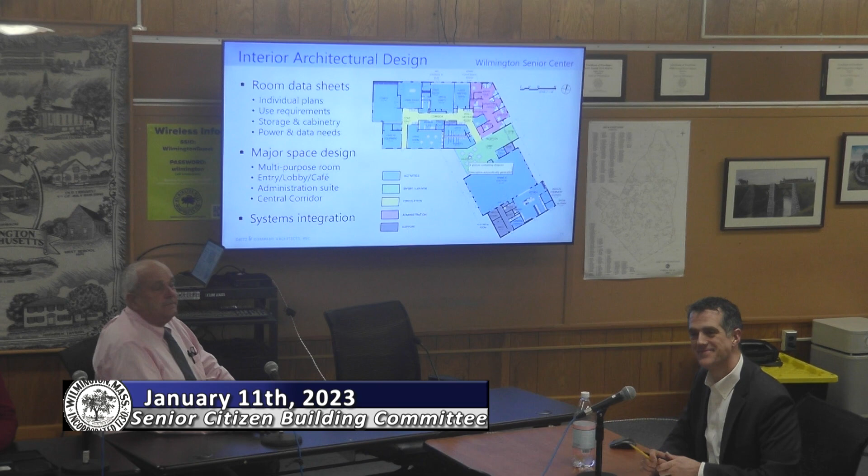Okay, next, that's it, thank you. Do you have anything else on the agenda? Any other questions? We were just going to talk about upcoming meetings - we already have the next steps, obviously.

We are going to put out, in conjunction with the recommendation of the Board of Selectmen from the October meeting, another newsletter in the next week or so, just defining what design development is and what the building committee will be doing in the next few months - kind of an overview of what we went through tonight, so the public can stay aware.

Should we plan our next meeting, say the 25th? If we can do it virtually, we'll let you know by the end of next week. So should we keep our every-other-Wednesday schedule open for now?

So we'd be looking at the 8th of February. The 22nd is school vacation week - I actually won't be around for that. If it's virtual, you can be there - I will have a laptop. So you're saying the 25th, the 8th, and the 22nd - we'll just tentatively hold those spaces. 25th virtual, 8th in person, and the 22nd virtual.

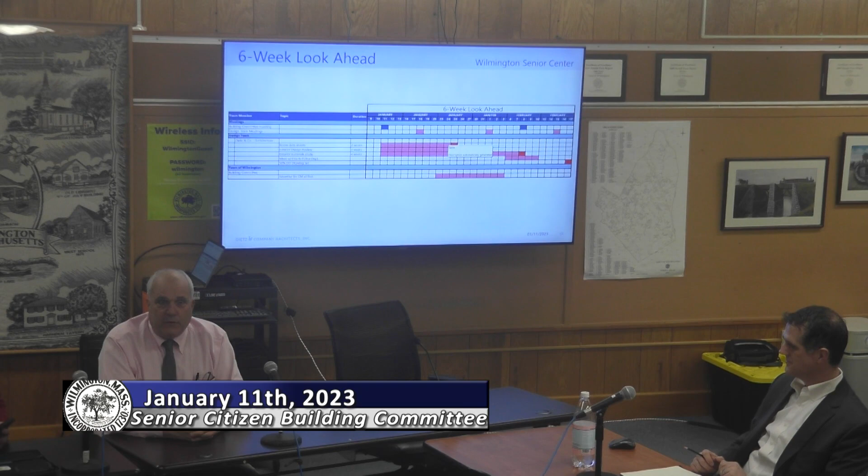It's very exciting. It's really exciting when you drive down the street, you don't know what's going on behind the fence, and then two weeks later you drive by and they're putting the roof beams up, and you go, holy smokes, it's a building! Long time coming.

Seeing no public, there's no public comment. Any other discussion? Diane has sent me three messages saying gas is better, gas is better, gas is better - bring gas to the building. We'll be discussing that - you're gonna get a presentation from the engineers, right? So they're gonna get a presentation on gas real quick. The kitchen's gonna be having a big...